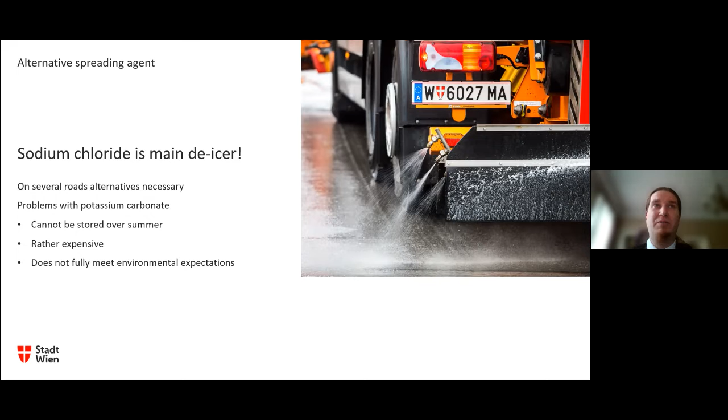So we asked Vienna University of Technology to cooperate with us, and they did this as sort of a diploma thesis. The project's goals were to find an alternative to potassium carbonate, to analyze the market and examine suitability, and to check the effectiveness of the product independently.

Often you get products with big claims by the producer, but in the end they can't meet these expectations. It hasn't been the goal to replace salt or brine, because we knew this wasn't going to happen. If we find something, okay, but we already knew we probably wouldn't find an alternative, and that's been true. So what's been tested in the laboratory was thawing performance.

We selected different spreading agents, and the first step of this project was to look at the market, what's out there, what can you use. We found around 20 to 25 products, and then we said, okay, let's pick some of them and do further testing with these selected products.

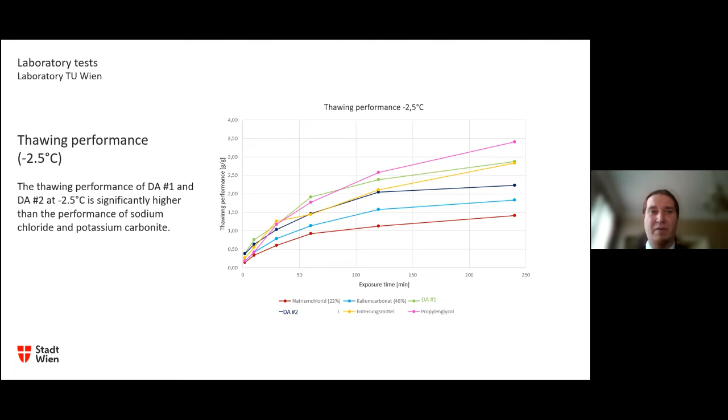That one graph showed only minus 2.5 degrees. It's a rather common temperature in Vienna for winter, but we tested it down to minus 10 degrees Celsius. You can see the lower the temperature gets, the less the difference between these two spreading agents becomes.

You can see after 2 minutes, 10 minutes, 30 minutes—it starts to thaw most of it within the first hour. Depending on temperature, but as you can see, within the first several minutes the difference is not so big. Afterwards it becomes bigger, of course.

So we know it works very well at the temperatures we have most often. We also know it works at very low temperatures, which can happen in Vienna—we might get minus 10, minus 12 degrees. So it might happen, and it works there also. Not that good, but of course sodium chloride is also not that good at these low temperatures.

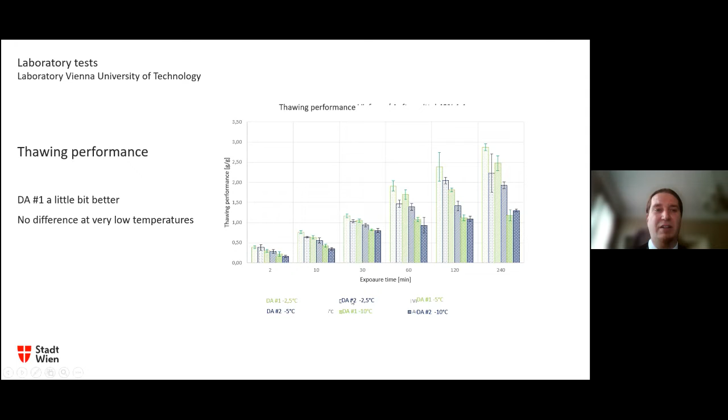So another thing we wanted to test before spreading it out on the road was the skid resistance, or friction, of the road. Does spreading these de-icing agents have a negative effect on the skid resistance of the road? This is a problem because we know from previous tests that there are de-icing agents that cause slipperiness just by spreading them out.

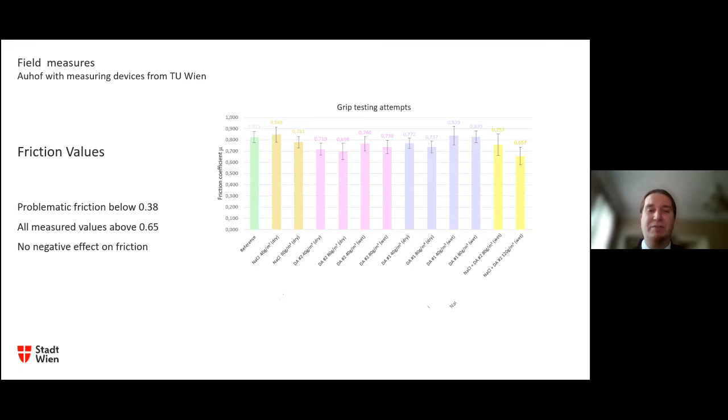So we know it's working as a de-icing agent, it's thawing, and we know it's not causing problems with friction. The final conclusion from the laboratory tests was: thawing performance is good, freezing point is good, friction is good, but price is rather expensive for all the alternatives we could find.

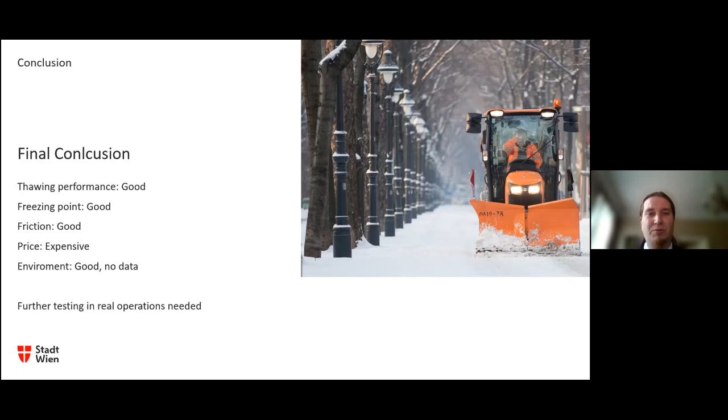So we are not sure about all of this, but in conclusion, we tried it out on the road and it worked last winter. We had our first tests in the real world, it worked there, but we still need further testing in real operations. We had some problems getting the de-icing agent in time last year due to a Corona lockdown, and they weren't allowed to travel into Austria. So this was a problem for us. We couldn't get enough material, but we sure hope that we will get enough chances this winter to test it out on the road as well. So thank you for your attention, and I hope I could show you how we try to find new alternatives. Thank you.

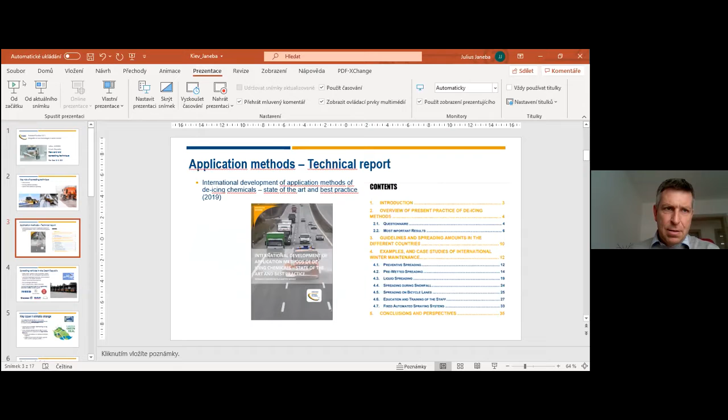Yes, can you hear me? Yes, thank you. Good afternoon, ladies and gentlemen. I have the following presentation, it's more practical, I would say, and it concerns technique. Wait a moment, please. And here it is, I hope. Now I just need to make it full screen. Can you see it? Yes. Give me advice on how to share it in full screen. Try F5. F5 doesn't work, I don't know why. Try presentation, presentation in the menu. Yeah, I can now. Yes, so it's okay now.

I will share something, especially from our country, from the Czech Republic, about new developments in spreading technique. I think we all know our task, our goal. We could spend hours talking about spreading technique worldwide. We know we must make the roads as safe as possible, and it's the same everywhere.

I would draw your attention to the technical report of our committee, the PIARC committee, and you can see the content on the right side. It's the last report from 2019, covering what we address, which connects closely to what Peter discussed yesterday and what will be discussed tomorrow. It's closely connected to the technique, to the vehicles that must be developed and renewed, and development must not stop in this field even if the winters are almost the same.

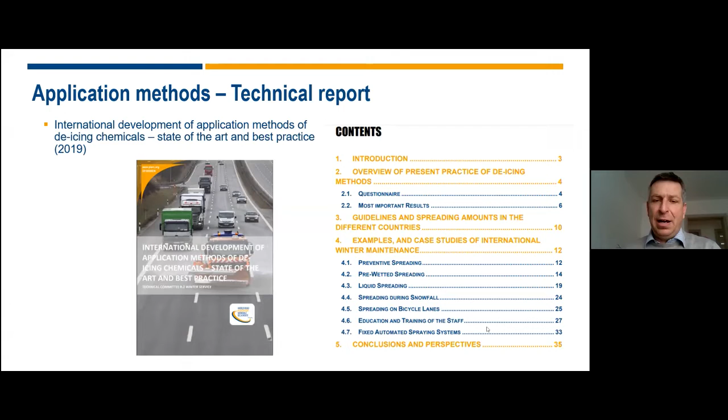In the Czech Republic, I would start not with the spreaders themselves, but with the engines, with the vehicles. We are lucky that within the past 10 years we have made significant modernization of our fleets. You can see below the marks, the world marks of the producers. It's perhaps the same across Europe, and we are not an exception in this way.

We are looking for effective and reliable vehicles, and of course low cost, which is quite hard to find, as the service and maintenance costs are getting higher and higher for us, since we are not able to make self-repairs as we did in the past. On the other hand, for the drivers the comfort has been improved radically. Of course we have new technologies, we must adopt new things like AdBlue tanks and so on. So, very shortly, we are quite lucky that investments have come into winter service technique.

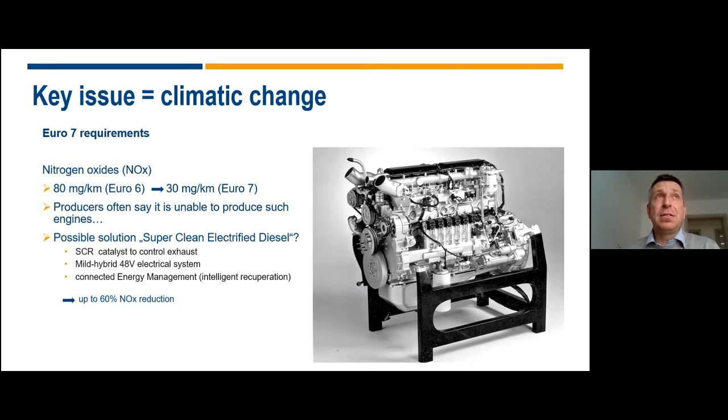Where is the biggest problem? Perhaps it's the nitrogen oxides, where they should be reduced from 80 to 30 milligrams per kilometer. Perhaps there is one solution where all these measures are combined, meaning the catalyst, the mild hybrid system, and intelligent recuperation. We shall see, but definitely it will bring us quite a big challenge in our fleets to fulfill these requirements.

In the Czech Republic, we have a specific thing about the spreaders development. I got this map from my region where I live. We have the main roads, the motorways, and the first-class roads cleared with de-icing materials. It's okay, but we still have a big amount of second or third class roads, the rural roads, with abrasive materials, mostly fraction 2 to 5, just aggregates.

And we are quite hardly fighting with the environmental offices, as they don't allow us to use salt or any other de-icing materials, with the exception of potassium carbonate, which is used somewhere. This is what our agency solves at the moment. And of course it's got something to do with economic efficiency as well.

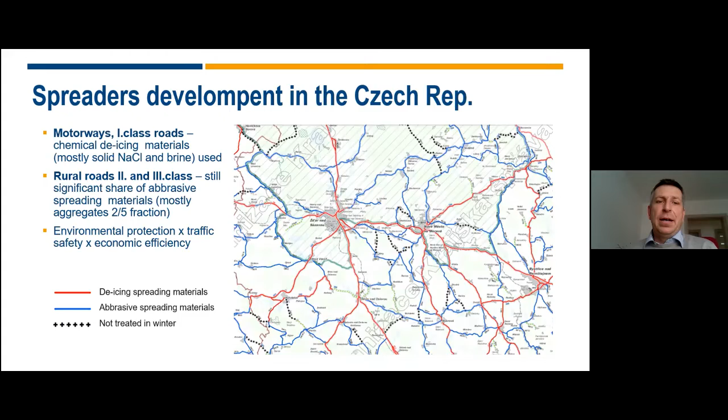But anyway, to do development, we are quite lucky that the practice of using more brine has also come to the Czech Republic. So we have new fleets of spreaders with enlarged brine tanks. As you can see here, it's the Danish producer Epoke. We have about 30 of these in the Czech Republic by now, and even in the local regions, winter agencies and administrators buy these cars. It's definitely a very good thing to use, especially on the more important roads.

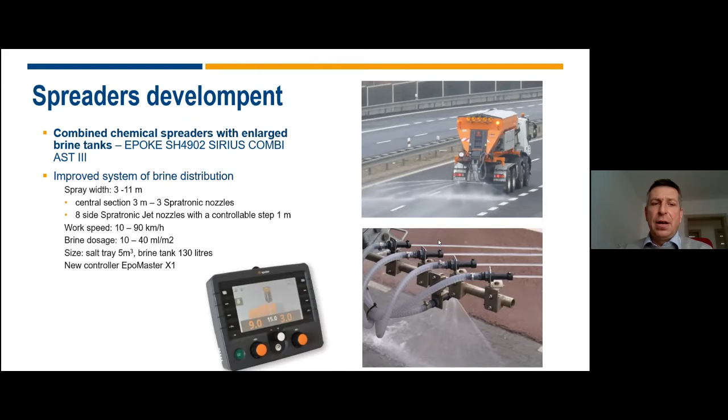Anyway, generally we are focused on flexibility of the trucks. I mean they must be used all over the year. One car must be able to carry different superstructures - the water tanks, so sweepers in summer, and of course these spreaders in winter. And the exchange of the bodies must be very fast and flexible. This is what we really need from the cars.

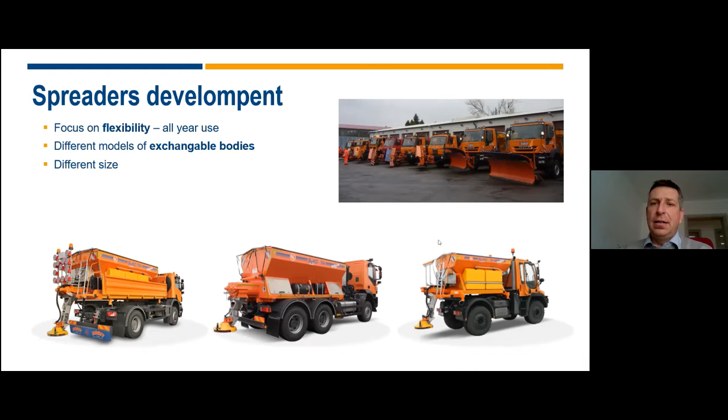I have a second part of my presentation, something different, and it's got something to do with Ukraine, which is my favorite country, and we have many friends there. It comes from history, from our relations with especially the western Ukrainian regions.

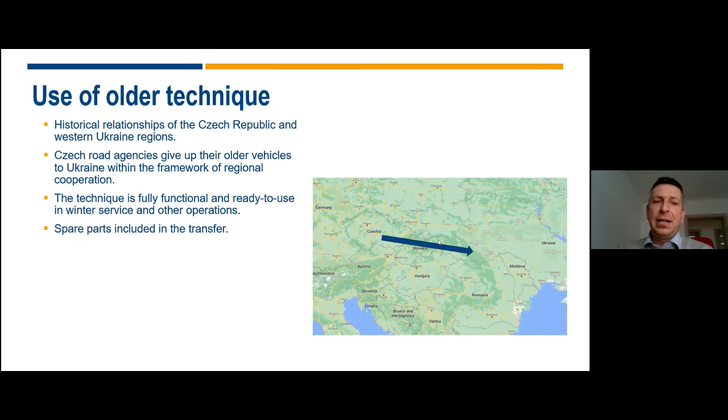We still have good and official relationships there, and one thing that we do is that instead of throwing our older technique to the wrecking yard or somewhere else, we send it to our friends in Ukraine, and they are quite lucky to have it, even although this is older technique from the 90s or even the 80s. It's in good condition, very robust, very easy to repair. You know, it's not very sophisticated, but on the other hand, almost each driver is able to repair it on the road.

We have this agreement that we can send them to our friends, and they use them there. I hope that they are still in service. This is the picture from 2018. This is me personally - I arranged this transport. This was by trains to the Michalovce station in the east of Slovakia, and then we went to Uzhgorod. It's quite complicated with the border, but finally it went all well, and the 6 cars, I hope, are in service there.

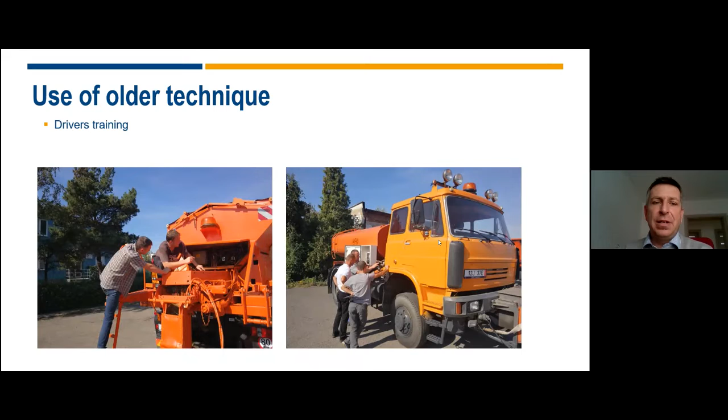We made some driver training. I got one of my drivers for each car, and guys from Ukraine came as well. It was a good meeting there. These are pictures - the right one is from Khust, that's definite. The left one is perhaps from Uzhgorod, I'm not sure, but they are in service there.

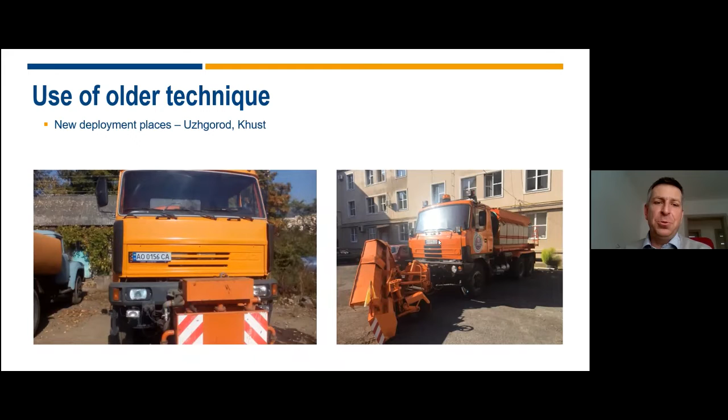Okay, and the same or similar thing has been done later from the South Bohemian region, 2 cars to Kolochava, which again is a town close to our history. And it's not about gifts, but I think it's about friendship, and I'm glad to know people in Ukraine - they are really good friends for us. They come quite regularly, and I hope that it will go on.

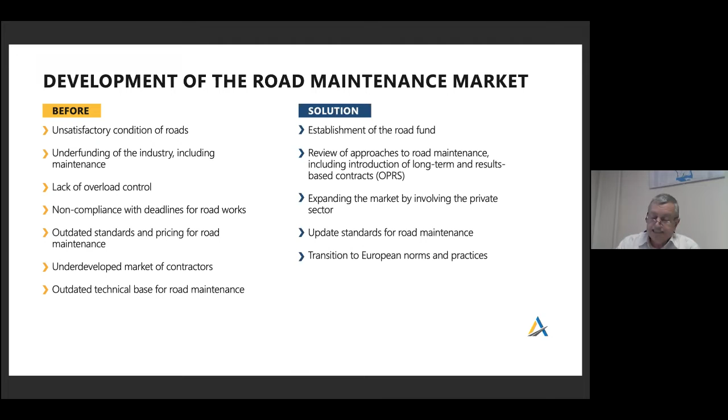So it's lighter during the winter time and has better traction, and so the braking distance is shorter. Since we have new roads, this is why we don't use abrasive materials—we only use saline solutions.

We have recommendations from the National Research Institute from 2019; however, they are very controversial. On page 5, there's a description of anti-de-icers. It says that de-icers can be used with chloride anti-icing materials. On the same page, we have the use of anti-icing materials.

It says that de-icers on a sodium chloride base are prohibited for the first year of road operation. So this is very contradictory, and it reminds us that when you have a child born, you need to feed and train that child for the first 20 years—you cannot do it all in the last, 20th year of its life. So we need regulatory requirements that will regulate the whole process.

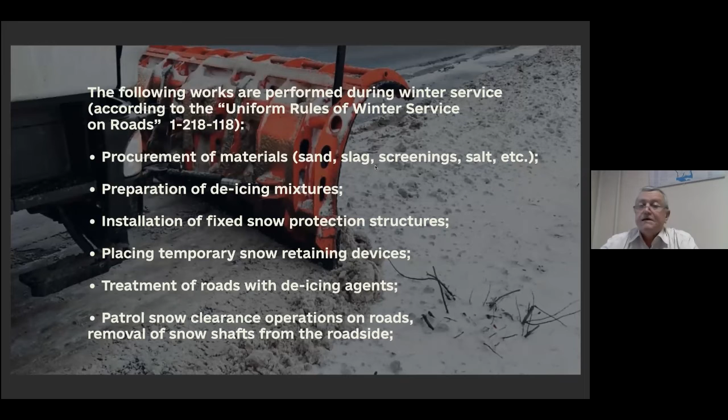Another issue is related to additional tracks from the fields—additional roads that lead to the fields. Right now we have conflicts with different agricultural companies who take their produce from dirt roads onto the M15 motor road, and we spend a lot of time cleaning it from silt and dirt. So I have issues with that.

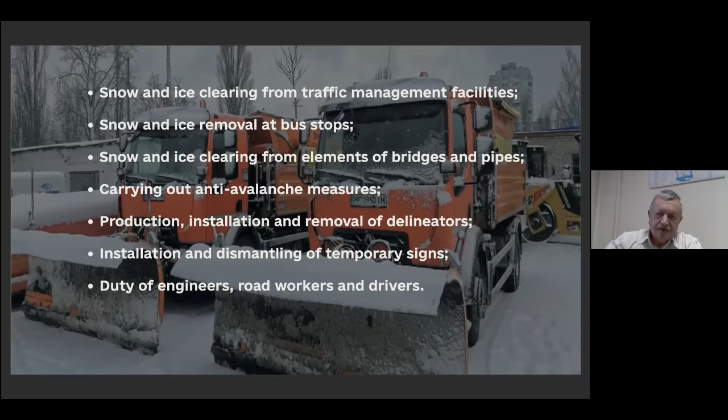So I have questions for Ukravtodor and the Ministry of Transportation. They need to insist that farmers place hard pavement on the dirt roads for the first 100 meters of the roads leading into the fields. This will help prevent dirt from going onto the motor roads of national importance. This is very important for Ukraine in general. Thank you very much for your attention.

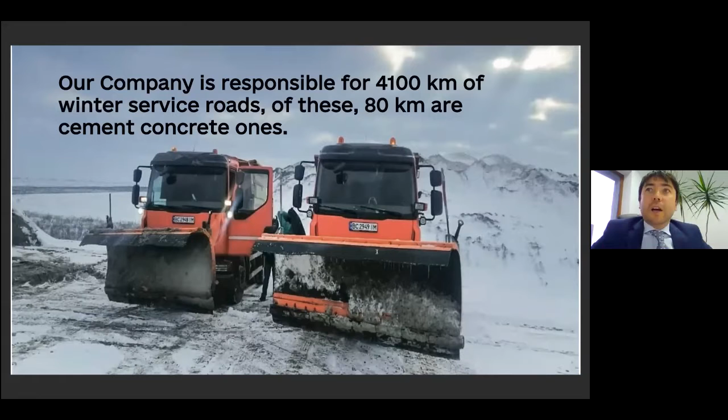Thank you, Mr. Fesenko. Do we have any questions to the speakers?

If not, then our next speaker is Vladyslav Demydenko from Autostrada Construction Company, and he will talk on best practices in winter maintenance from their experience point of view.

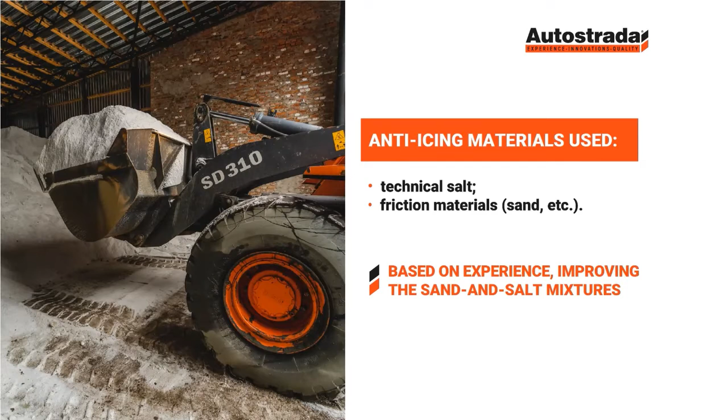Things we would like to change or see new in the winter maintenance system revolve around two things. First is transition to longer-term winter maintenance contracts, which will help us plan with higher efficiency and effectiveness over a long-term horizon. When we understand the long-term horizon, we know how to buy machinery and modernize the storage bases and such.

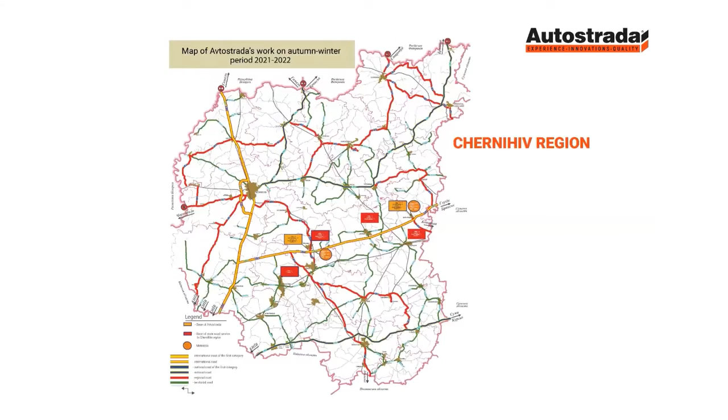The second thing is, for us, it would be nice to have implementation of build-and-maintain, where the road building company is responsible for maintaining the strip of road it has built. As we build the roads, we provide a guarantee for the pavement, and we're really confident in its high quality.

However, if the maintenance is not done at a proper quality level, this will lead to lack of timely repairs because the company is not responsible for the road. So where the same company is responsible for both maintenance and construction, this will improve the quality of roads, providing higher convenience and safer traffic at any time of year.

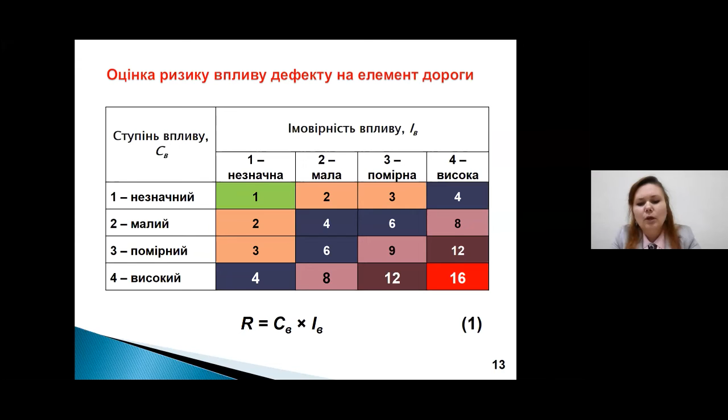A new notion was introduced: the risk of the defect impact on the element of the road. This is now determined for each element of the road. The priority for defect remediation is given to defects that impact the safety of traffic.

For us, this is also a principally new category, which is already available in foreign experience. As already said, the levels of motor road maintenance were classified under the levels of maintenance, and the main classification does not contradict our regulatory framework and is contained in the acting state standards and provisions in Ukraine.

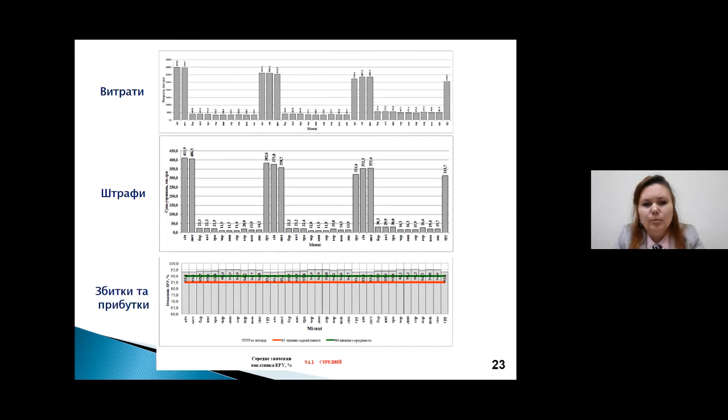Within the framework of this year's study, an identification model was developed and applied in Microsoft Visual Studio in order to substantiate the levels of maintenance of motor roads and establish the penalty scores that could be applied under the state standards adopted in Ukraine. According to the results of modeling, we can approximately forecast the expenses, possible penalties, profits, and losses according to the levels of maintenance.

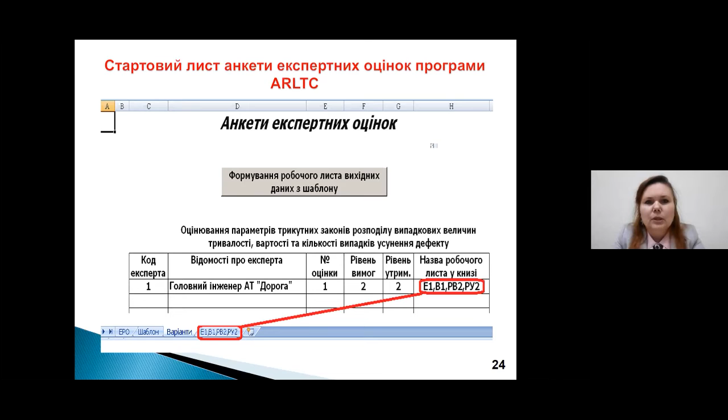Expert evaluation from experience allows determining the level of requirements at certain sections by questioning the experts who carried out the works at this particular road section. We carried out the modeling, and as a result we have three regulatory documents for our sphere of economics. We plan for the future to work toward substantiation and the draft of OPRC according to the long-term principle that is based on performance. Thank you for your attention. I am open to answering any questions you might have. Thank you.

Thank you, Professor, you're right on time. For those of our listeners who are not familiar with Ukraine, let me add that OPRC contracts are pretty rare and new to Ukraine. We only have one case of such a contract being used, by the Lviv Road Agency in the western part of the country, and this contract has ended recently; we are now in the process of prolonging it.

But to the Ukrainian government it is of utmost importance to set up the legal framework for these contracts to be implemented on a regular basis across the country on all types of roads. If there are no questions, let me pass the microphone to Stanislav Gvozdikov, who is Deputy Director of the Scientific Road Institute. This is the institution that deals with standards in the road sector and provides research and all the relevant scientific work associated with roads and their maintenance. So please, Stanislav.

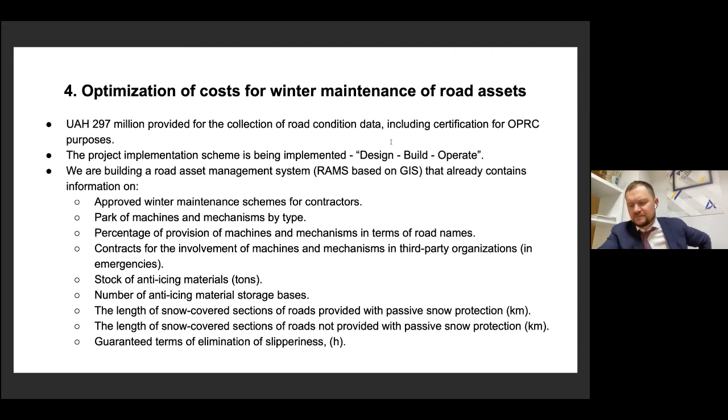Take away from this presentation is the fact that Ukraine has experienced explosive growth in road spending, both for new construction, for capital repair, and also for maintenance. As Stanislav has rightly described in his presentation, we can see the numbers and they're pretty impressive. So whoever is interested in the Ukrainian market, Stanislav is the man to go to in terms of getting basic information about how things work, what standards are applied, and so forth.

Okay, and we're approaching the next part of our session. It will be about the existing OPRC contract and the experience that the government and the contractor have had with this contract. Our next two speakers will be Oleg Bereza, who heads the regional road agency in Lviv region in Western Ukraine, and he will talk about his experiences on the pilot project in the OPRC contract from the government standpoint.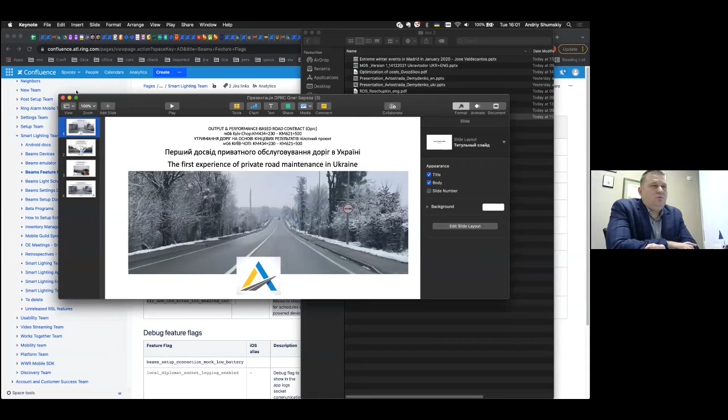Let me share some experience regarding such contracts. It was very important, this was one of the first contracts for Ukraine, one of the first ones on servicing of private companies maintaining roads in Ukraine. So in 2014, when it was signed, previously it was all in the state company, which was a monopoly. For us, it was very important to see the opportunities to combine the way it happens in the private sector, where the private company is able to make managerial decisions quicker, and how the road lasts after construction and maintenance is completed. So in 2014, from Lviv and Rivne border to Stry, we had zero serious changes. This road, based on the protocol of servicing that was enacted to implement this contract, we were able to maintain. I believe it will be serviced until changes with regard to the M06 road are enacted, and I think it will still remain in very good condition. This part of the road, M06, is one of the arteries both for Lviv region and for Ukraine in general, since it connects the utmost western borders and the center of Ukraine. For us, it was a high priority to keep this road in well-serviced condition.

We had paid great attention to the challenges related to servicing. This contract of attracting a foreign company, including the engineering company, had actually turned out to be very fruitful. Currently it is still one of the best examples of good servicing in Ukraine, because the safety devices, lighting devices, and safety procedures implemented, and also related to good technologies of surface treatment, including correct servicing of these road sections.

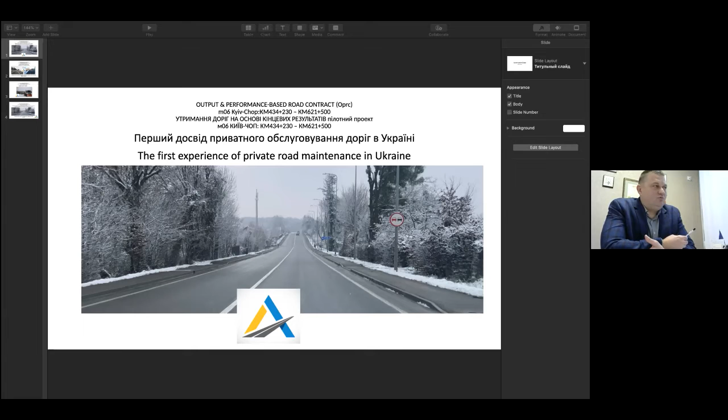That was related to additional treatment with regard to pothole treatment, and they yielded positive results. So of course we had an engineering company. They were performing the technical supervision, and it was very important as well. This was the third involved party that was helping maintain the mutual responsibility of all parties. So the client was laying down the rules, and the engineer was supervising, and the maintenance was done by the contracting company. So it was very important for us

to see what was happening with regard to payments. The payments were evenly distributed, but the result had to be maintained at high levels. It was very important for us to understand what we were aiming to achieve. This is why the engineering company and their role was crucial. They were performing supervision, and then, if necessary, penalizing the company. So therefore, we obtained a very good result, regardless of the weather conditions.

We had, sometimes even in preventive ways, performed measures necessary to maintain the road in good condition. It was specifically related to winter maintenance, because this region of the country is very susceptible to changes of weather, where from the Carpathians we have different abrupt weather changes, and so it has played a very big importance.

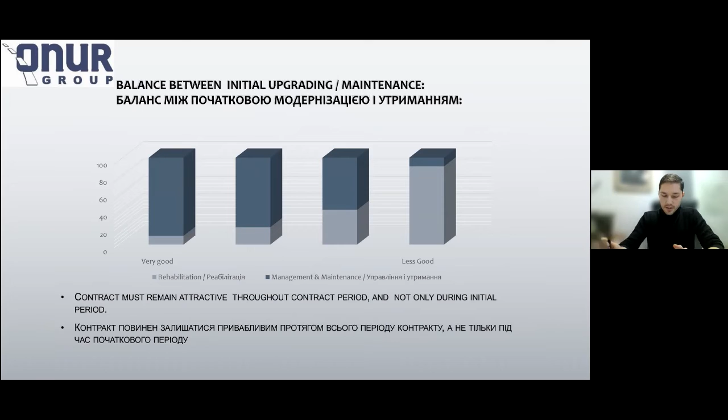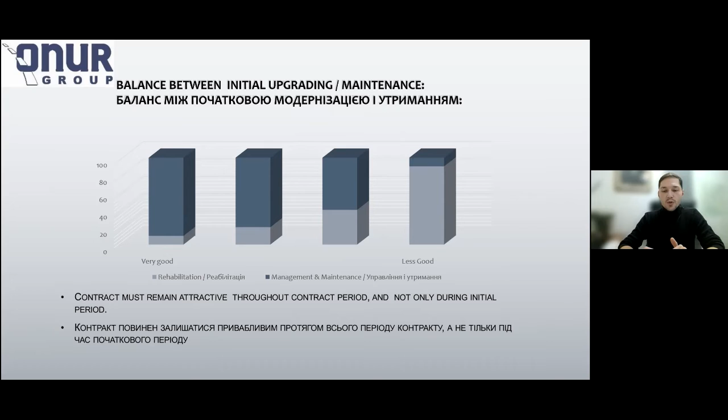As you can see on the presentation, if the rehabilitation works are not good, the management cost is really big. If the rehabilitation works are more than 60-70%, the management and maintenance cost is really low.

Let me talk about service levels and specification. Specifications included in the contract describe a level of service expected for the road. Road should be workable is our main idea. Level of service is defined in terms of usability, travel speeds, road surface conditions, safety features, roadside assistance, etc. The contractor has to ensure that road users get a certain level of service.

Service levels are set for the following: road open to traffic, emergency incident response. For every accident, the contractor goes to the accident site and does all works needed. Road pavement, unpaved shoulders, drainage system, road signs, road marking, road safety barriers, highway lighting, traffic lights, landscaping, cleanliness of surface, bus stops and road toilets, structures.

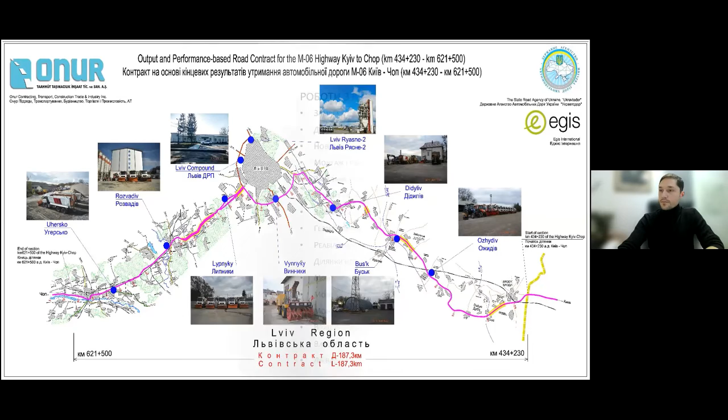During our contract period, we made rehabilitation and improvement works. For example, replacement of road signs - we replaced all of the road signs - surface marking with cold plastic, new plastic delineators, installation and repair of safety barriers, general clearance, surface repair of concrete structures, protective coating of concrete structures, linear crack sealing, rehabilitation of special section 1 and special section 2.

These were included in the contract: new road lighting sections in 27 inhabited locations, installation and repair of curbstones, installation and repair of drainage system, movement joints, arrangement of road weather stations, arrangement of vehicle waiting stations, and elimination of black spot areas.

If you are talking about the maintenance criteria, first is road user's comfort. A certain level of user comfort must be assured on the maintenance roads: road pavement free of pothole, rutting, patching, and other deformation; unpaved shoulders free of pothole, rutting, depressions, etc.; highway lighting; cleanliness of surface, free of debris and hazard; bus stops and road toilets, shelters and waiting areas intact, clean and free from graffiti.

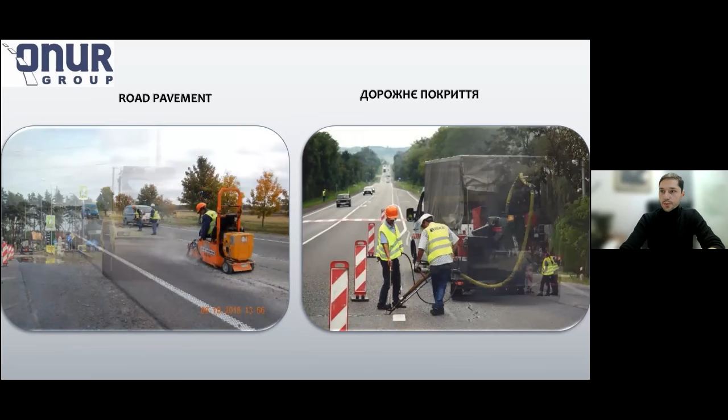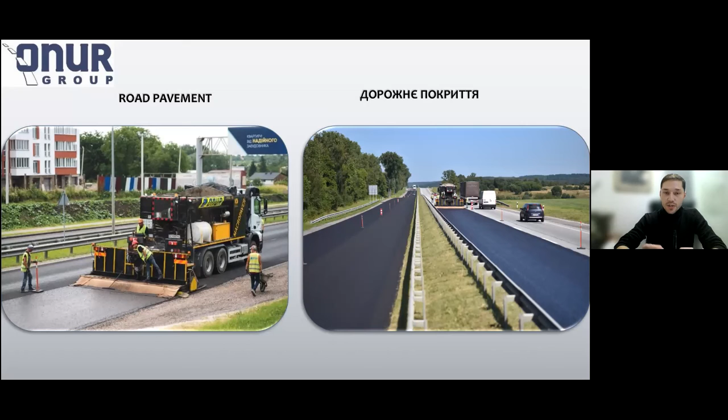In the first and second year of our contract, we made a lot of improvements and rehabilitation works: crack sealing works, patch repairing, slurry seal, microsurfacing pavement. It's really a new technology for us, M06. It's the first place where we did it, with special techniques and special technicals.

You can see the road before and after. The right side of the road is with slurry seal and the left side without.

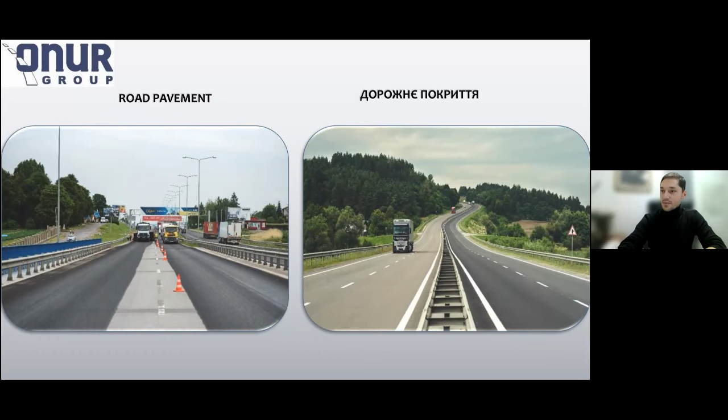And also I want to add road pavement skid resistance. We make skid resistance measurement every year, two times a year. After this skid resistance measurement, we decide where we will do the improvement rehabilitation works or the slurry seal works on the pavement. As you can see, it's the special equipment for the skid resistance measurement.

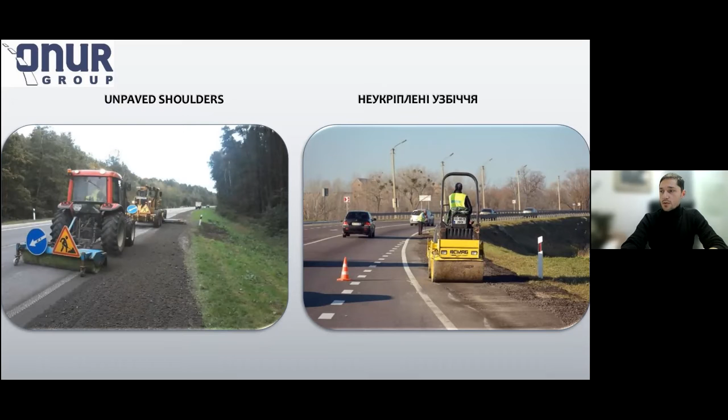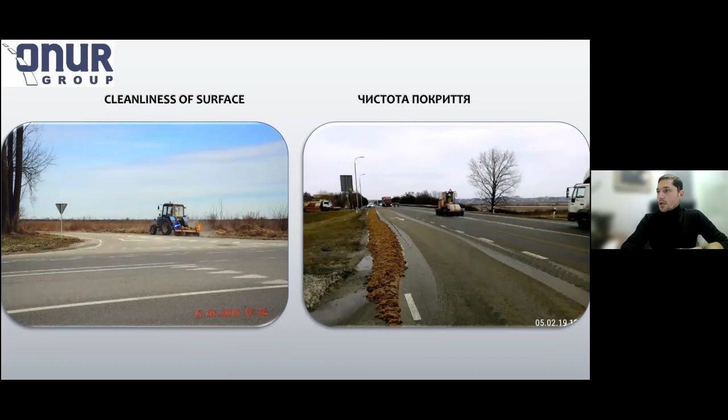All of the unpaved shoulders without pothole, highway lighting, cleaning of surfaces. These photographs are after winter maintenance.

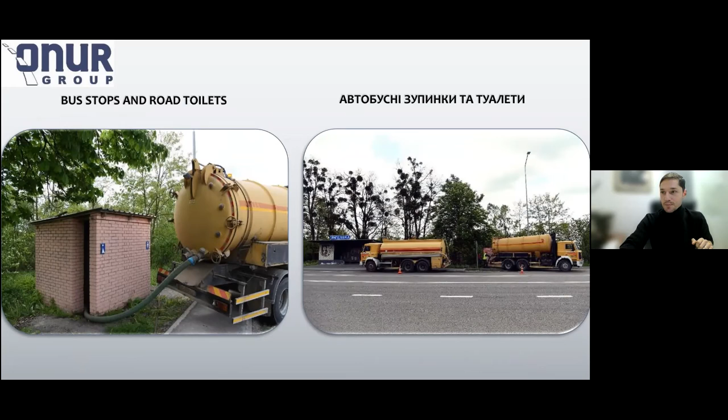Retaining material of roads - all of the retaining material we cleaned from the roads. And also it's a little bit different photograph of our works. All of the toilets and bus stops are periodically cleaned. Also bus stops repairment, concrete surface repairment. And the second criteria: traffic safety.

Road marking, traffic signs - as you know, they must be visible and without damages. Safety barriers without damages, free of damages. Traffic lights. Emergency incident response.

After every accident, we engage with the police and ambulance and road users calling us. We set up the temporary traffic management scheme, secure the site, and sometimes we were faster than the police and ambulance.

Road marking works, also demarking. Safety barriers after accidents, pedestrian safety barriers, traffic lights, and emergency incident response.

Every accident, we made reports. We report to our employer. All of the accidents we collect, and every month we share our report to the employer. After accidents, we clean the accident area.

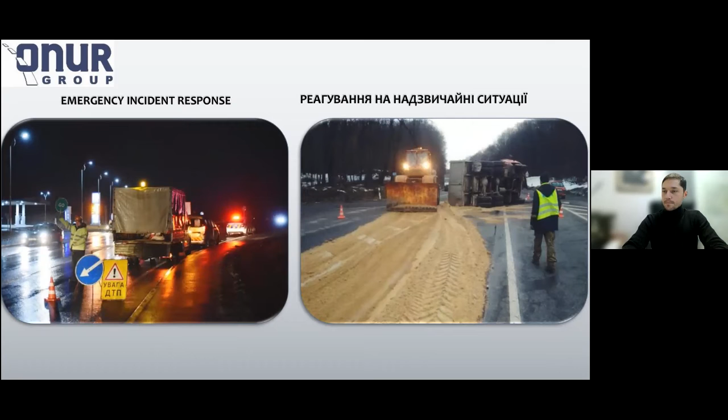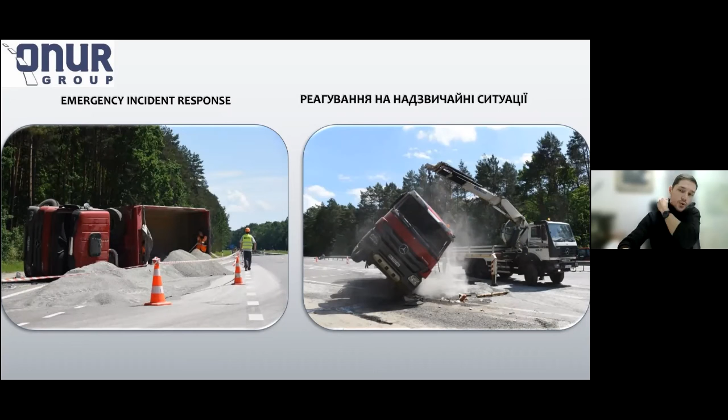You can see every accident we should react to. And daily, emergency inspection, 24 hours, 7 days - our teams were on the road daily, inspecting the road, and our call center reported to police and employer if something happened on the road.

And the third criteria is the durability of the road. Landscaping areas and vegetation along the road - for example, grass height in our contract, according to places, more than 25 centimeters or more than 50 centimeters is not allowed. If the grass is more than 25 centimeters high, we should cut it. If we don't cut it, we are punished.

And drainage and culverts free from damages. Structures, bearings are complete, intact, and lubricated. Expansion joints must be present, intact, and clean. Concrete elements free of cracks and damages.

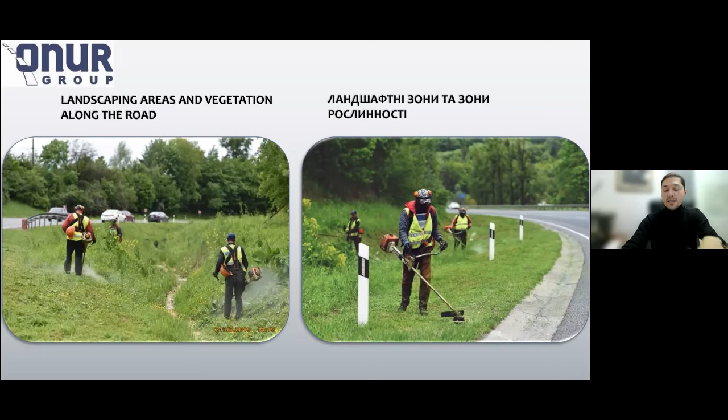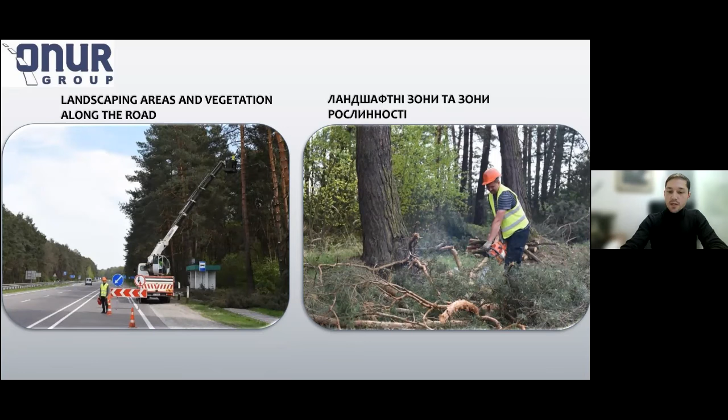Special technicals we included in our works: little minor tractors, little equipment, attachments, special attachments, cranes for cutting emergency trees.

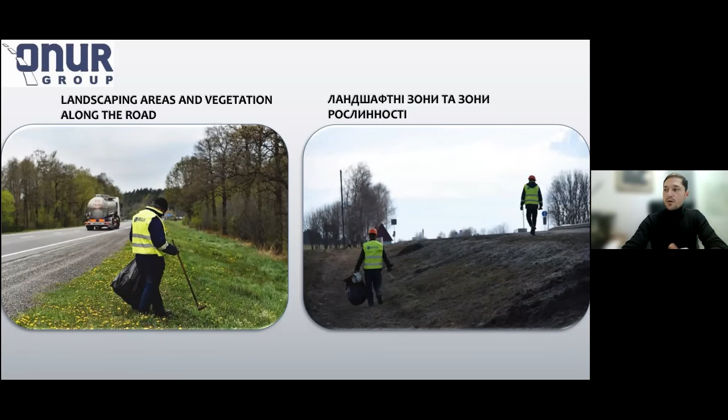Collecting the rubbish every day, routinely we collect the rubbish from the roads. I can tell you about hogweed - it's a really dangerous and poisonous vegetation. We work with it because in the Lviv region hogweed grows a lot. We bought special equipment, special chemicals, and every year, at the beginning of the season when it's not growing a lot, we pour this special chemical and treat it.

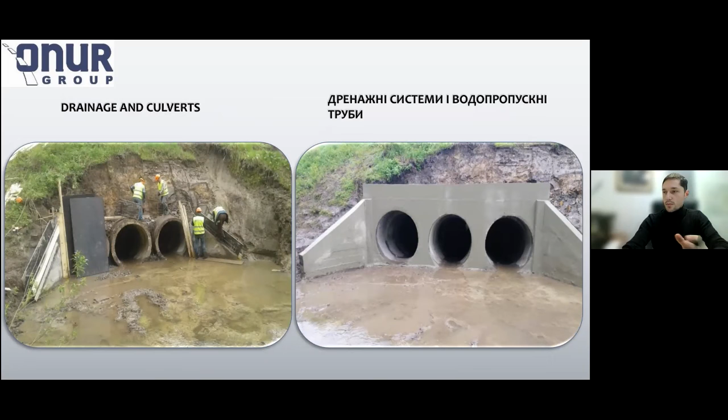Drainage and culverts - if something happens to the drainage, we renew all of the structure. Repairment, cleaning.

Also with all of the bridges, monthly, every month we inspect the bridges for defect collection or detection, and if there are any defects, we quickly liquidate them.

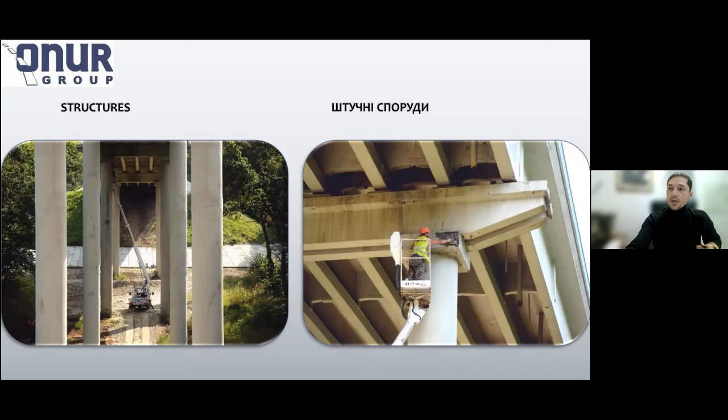And we include some other technicals also for our works, because there's train rails, expansion joints.

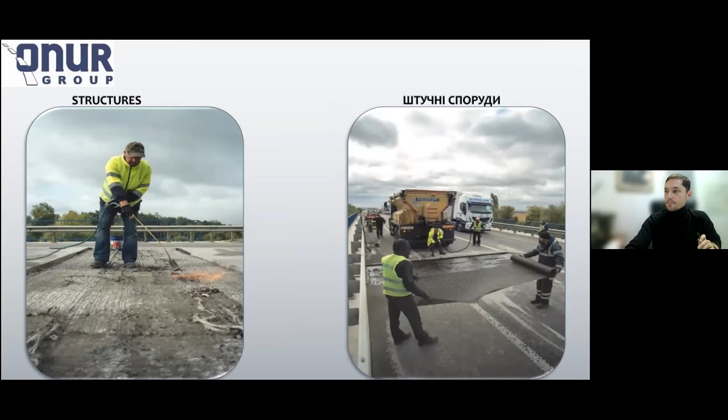And the criterion for winter maintenance: carriageway, other traffic lanes and side roads, footways and pedestrian zones. Carriageway without snow, snow slide, snow slush or ice within 2 hours after precipitation stops, and other traffic lanes and side roads within 4 hours after precipitation stops.

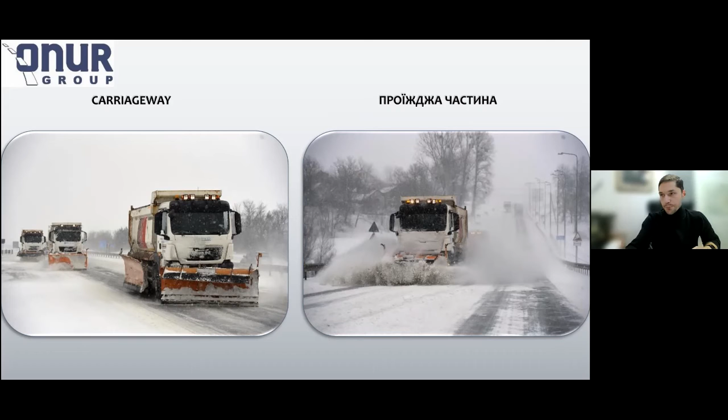Our machinery - you can see the photos. We had almost 72 pieces of machinery for these 200 kilometers of roads, and 196 people.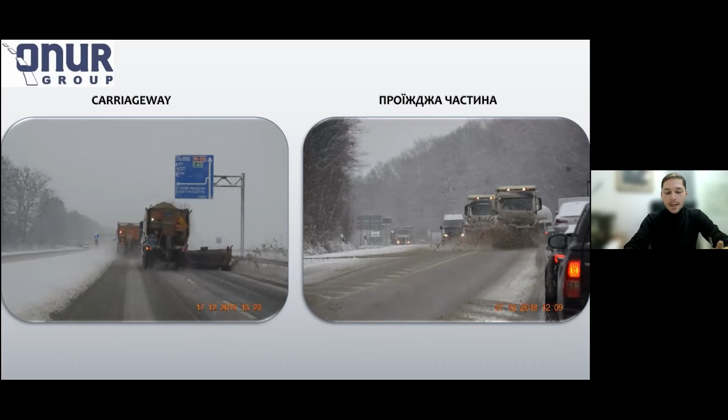There was a question about the bus stops, I want to answer it. All of the bus stops are manually cleaned, because our mechanical cleaning is with tractors, and this includes the pedestrian ways - all of them are cleaned manually. After winter, after the snow, with the tractors, all of the carriageways and traffic lanes and side roads.

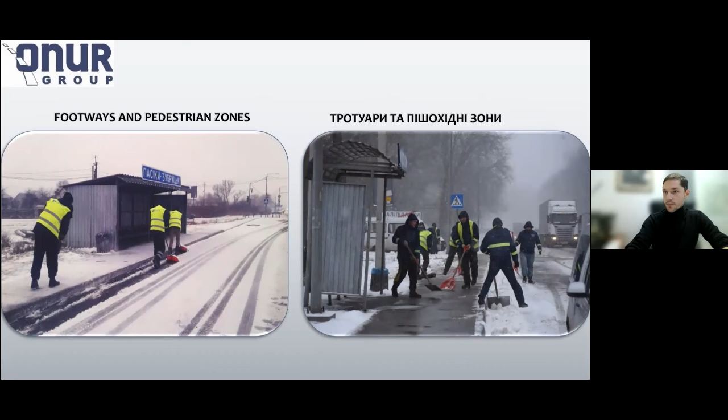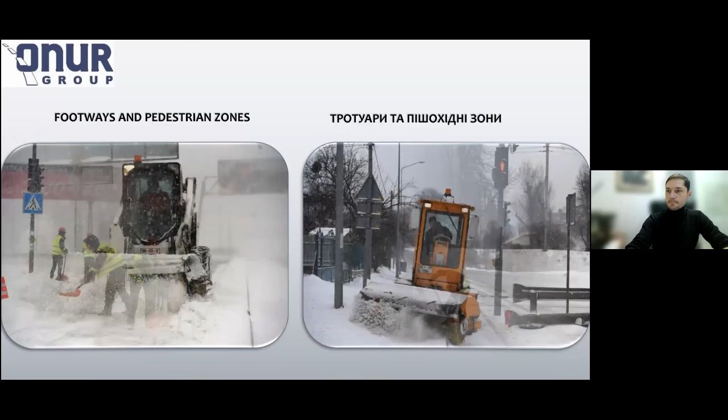As you can see on the photos, all of the bus stops are cleaned manually by people. Pedestrian zones and footways are also all manual cleaning, with brushes and small technical equipment. We also cleaned all of the drainage systems after the snow, because if we don't clean the drainage system, all of the water will be collecting and it will be dangerous for the road users.

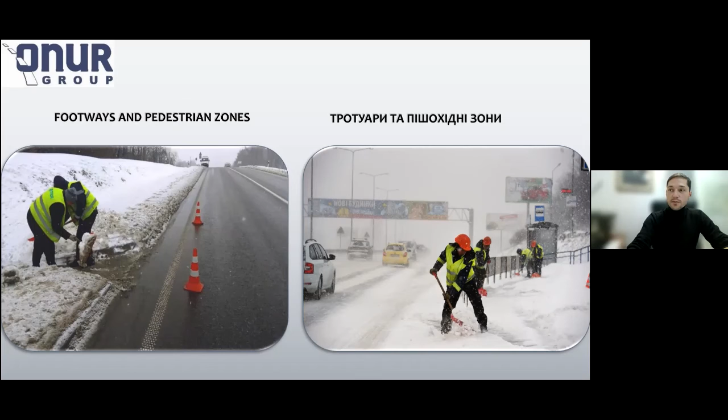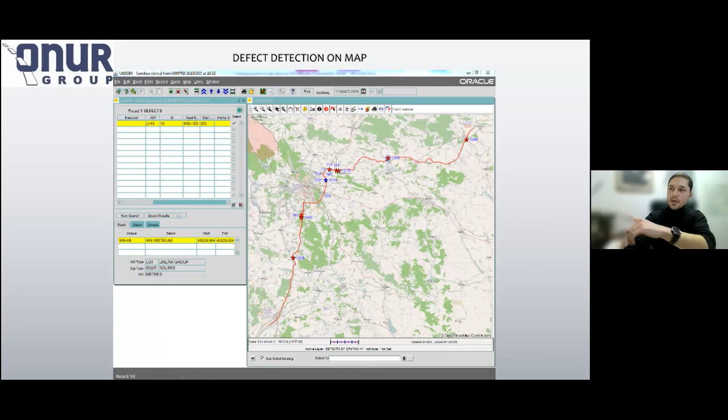So because we have some time, the management information system is finishing. Management information system is our system that does daily inspection, the defects detection, and after that, if there are defects, opening the NCR. The NCR is automatically calculating, and after that, if we do not close the NCR, we are punished. Every point is for one of the defects. Opening the NCR and opening and closing NCR.

And the call center, we had 24 hours and 7 days. In addition, our contract required us to do environmental seminars, traffic seminars and HIV/AIDS seminars. We did these in the schools and in residential places along the M06 highway, with the national police, on traffic safety seminars. Every month we did one seminar in the schools. Thank you for your attention.

Thank you, Tolga. It was a great presentation with lots of details, lots of pictures that show your daily work. As an end user, using this section of the road many times, I can say that it's always been in good condition. There are some questions to you, and I also have a question.

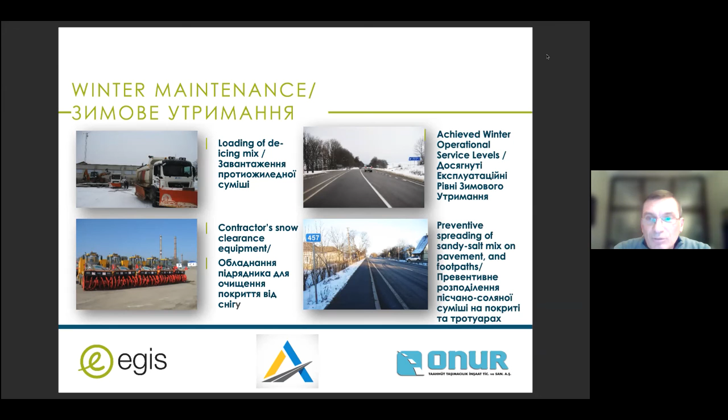So these projects, I believe, are very viable and very successful. This pilot project proves it. Thank you very much.

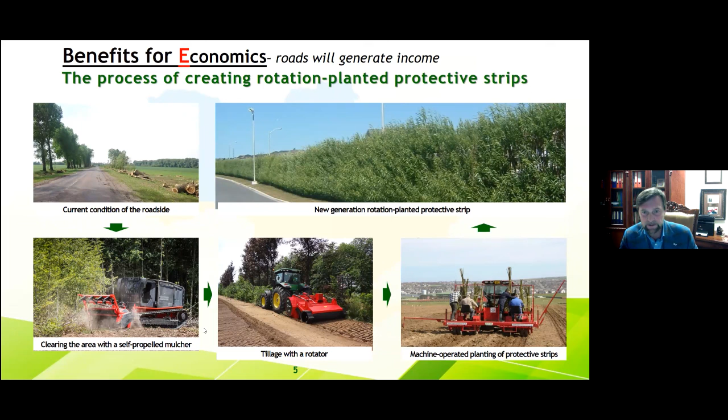So the machinery that I told you about - I can leave my presentation in the shared folder. With regard to snow, together with the Institute we have calculated that if we create such vegetation rotationally planted, we will be able to cut it.

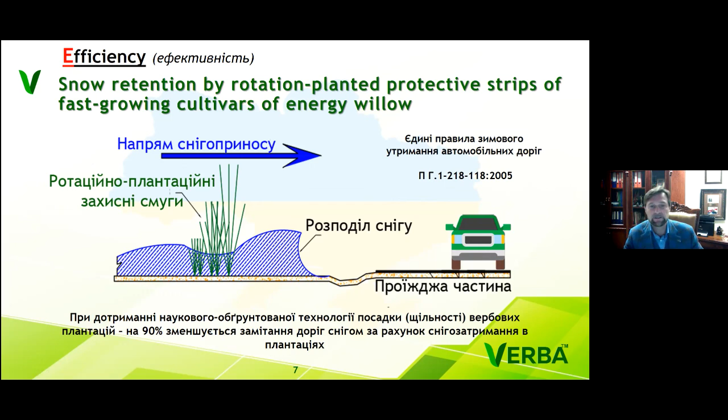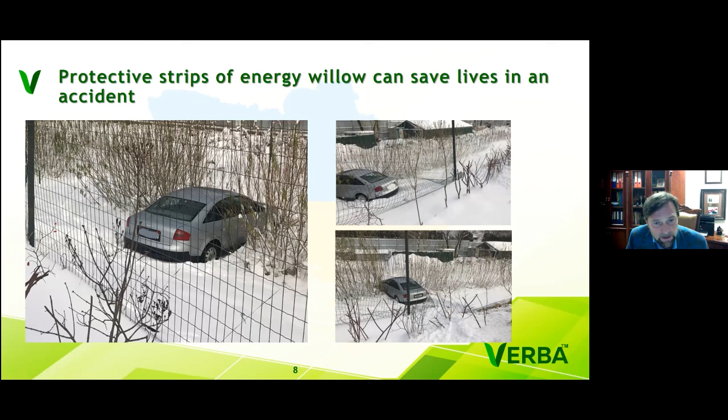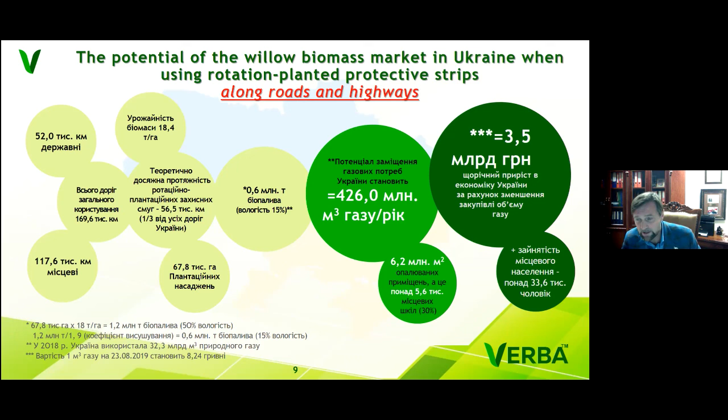This is the way it's going to work: per kilometer of road per year, it will intake 80 tons of CO2 emissions from that kilometer of road. You cut the top of the trees, and they regrow again, but you can use the trees for fuel. With regard to CO2 emissions, we have calculated that out of 1,000 kilometers of roads, 80,000 tons of CO2 emissions per year can be compensated.

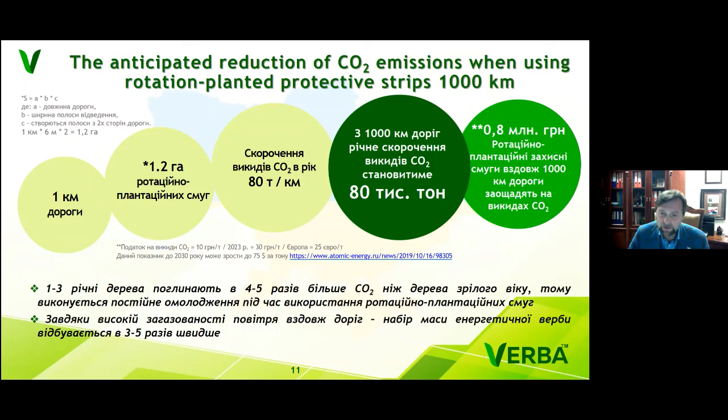This is a lot. Since Ukraine is part of the Green Deal program, we are obligated to cut our CO2 emissions. These trees, since every 3 years they are cut totally and then regrow again, will be able to process 4 to 5 times more CO2 than older plants.

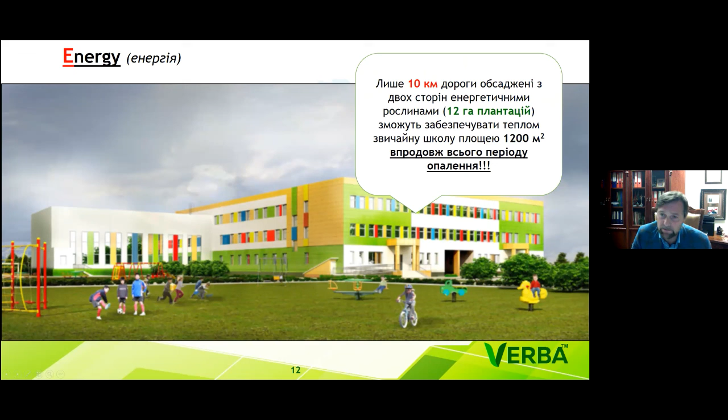So 10 kilometers of road - meaning village roads with minimum width planted on both sides - will be able to provide enough fuel for a school of 1,200 square meters for a year.

So this is energy trees.

Very interesting. Thank you very much, Leonid. It's an interesting concept.

We are through with all the presentations, but we still have some questions. There is one more question in our chat, addressed to Mr. Tolga and the Nur company. The question is from Kharkiv Regional Road Agency: What was the amount of equipment and vehicles used during the day on the whole section covered by the OPRC contract?

For the daily inspection, it was 2 double cabin Gazelle vehicles and 3 machines. 3 machines for the engineers and 2 double cabin Gazelles for the workers. They worked only for accidents and daily inspection.